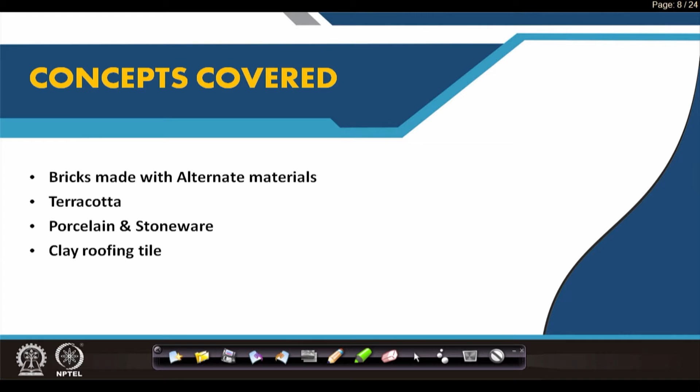So welcome back, let us start today's lecture, lecture 3 of module 1, which is the continuation of clay products. What will be covered is basically bricks made with alternate materials, a shift from clay. We will look at what alternate materials help in making what is also called brick, and then go back to clay items like terracotta, porcelain, stoneware, and clay roofing tiles.

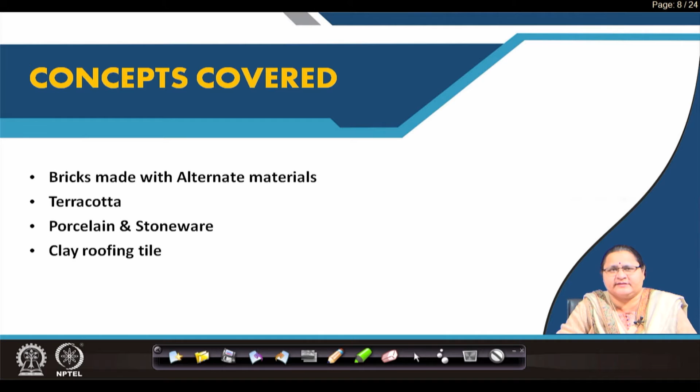Brick, as we have all understood, was the basic building material that most of our country, or developing countries like ours, are using, but it causes a lot of depletion of our natural resources. At the same time, we need to look into wastes, how we can take care of them, and whether we can use them up in the form of this tablet or brick.

Fly ash is one such waste product coming out after combustion of pulverized coal. It is very fine, finer than sand, and moves around in the atmosphere in and around a thermal power plant generation area. It pollutes the atmosphere too, but it is collected in ash ponds, from where it can be carried to a brick making area, and following similar principles, it was evolved as an alternate building material replacing clay brick.

So it is a little lighter than clay brick, absorbs less water, is machine made and dried in a controlled environment, and no burning is required. It is less energy intensive. At the same time, it is consuming a lot of waste material.

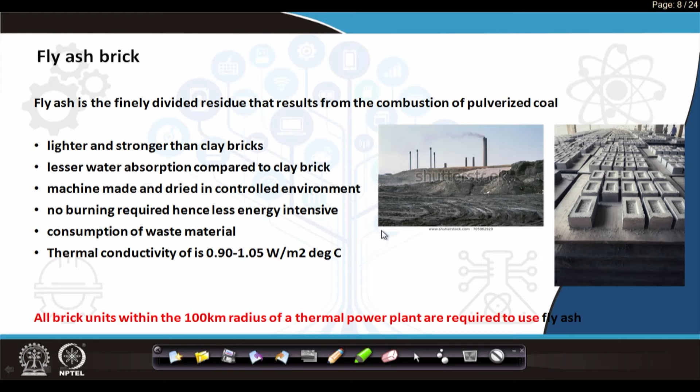So what are the advantages? It is less energy intensive, it uses up the waste as its raw material, and it does not take so much time. It has to be dried in a controlled environment and then you can sun dry it.

These are molded from machines, as you can see in this picture taken from Gava fly ash brick factory in Kharagpur. You can see the fly ash which is lying around has been converted to this brick. So a lot of construction is being done using this fly ash brick.

It has become popular and gradually it is at par in price with clay brick. Earlier it was coming much cheaper, which was also a reason why general people did not buy it. They thought it was cheaper because it was inferior in quality, but it is not like that.

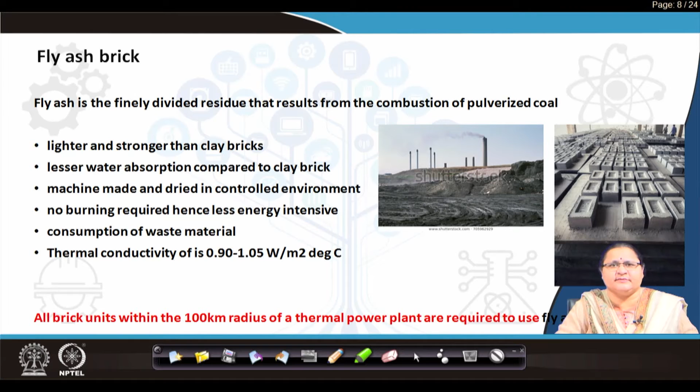Fly ash brick is one such item, and if you see the ingredients, fly ash is around 60 to 80%, and the rest is sand and cement, which is around 8 to 10%. It may also be replaced by lime, because cement or lime is the stabilizer which helps the items to bind together.

These are mixed with the desired amount of water to get the desired consistency, molded, control dried for 24 hours within a factory shed, and later put under the sun and then made ready for the site.

You can see the strength here, it is as good as a second class brick. Weight is almost like that of a first class brick, however clay bricks may be a little heavier. Fly ash brick maintains this 2.6 kg weight, and its use is similar to that of clay brick.

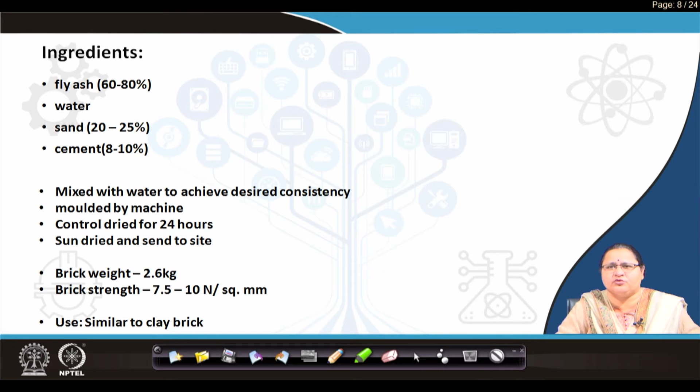You may plaster it or may not plaster it, because the water absorption, which I think is not mentioned here, is also up to 15%. Now I introduce another item, which is since 2005, our Auroville Earth Institute has experimented with earth blocks.

So this is compressed stabilized earth block in form of bricks or in different shapes as required. This is moist earth or clay, what we call, under high pressure around 20 Newton per square millimeter pressure. They are becoming building blocks.

They are having much lower embodied energy as compared to even fly ash brick and clay brick. It has low carbon emission. As fly ash brick flies around and creates lot of pollution, here the clay fired brick is also creating lot of fuel burning,

which leads to carbon emission. This compressed stabilized earth block is only using pressure to make it a stable earth item, clay item, and you see the compressive strength is also between 5 to 7 Newton per square millimeter, which is also quite good.

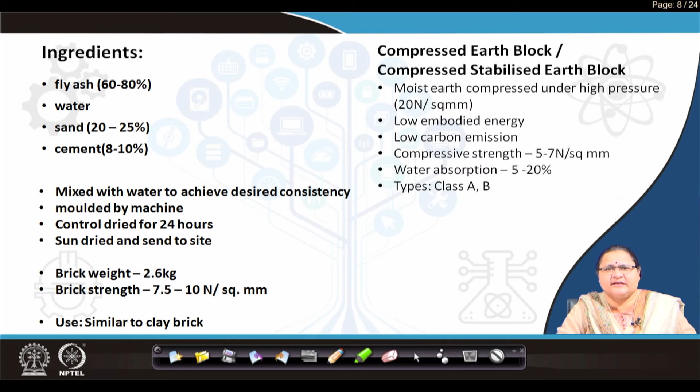which can replace fly ash brick or maybe clay brick. So with these all, I think we are over with all the types of brick items, which are the basic building block. Let us move to terracotta. Maybe some of you are familiar with this kind of image which has been displayed here.

This is the facade of or entry of a temple, and you can see lot of ornamental works being displayed, and this is facing the inclement weather. It is standing for few hundreds of years and nothing has been damaged. Why so? The ingredient is not just clay.

Clay has been supported with ground glass, crushed pottery, that is broken pottery items, which has been grounded and used, and clean white sand. So with clay goes, which is the maximum percentage, with which goes ground glass, crushed pottery and white sand, which again mixed very nicely many a time in the pugging mill and then molded out with this ornamentation on it.

And with this ornamentation, the entire thing is put into the muffle furnace and is being burnt.

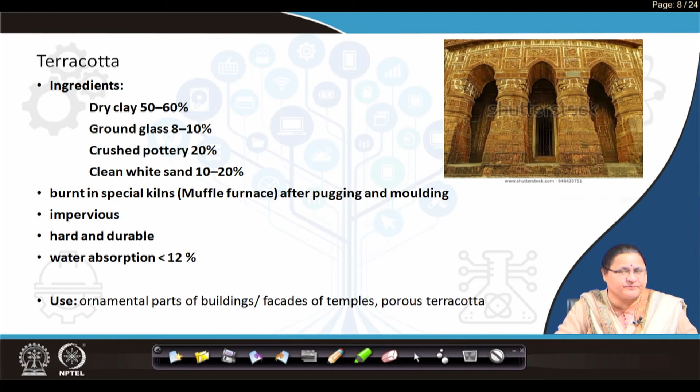Now let us move to the other two items, the porcelain and the stoneware. You can see the pictures on your left hand side, the wash basins, the cisterns, the commodes, the water closets, the sinks,

that is all the sanitary fixtures are having a glass like coating on top of it, and it is seamless, it is very smooth. It has, why is this used? Because it has antimicrobial property. It does not carry stain. It is not affected by acids and alkalis.

It has a permanent coating on top of it, which is the glaze, and you see it is made of china clay, feldspar, kaolin, silica and clay baked together at a high temperature to achieve vitreousness. As you had seen brick going up to 1100 degrees centigrade or so, these items are baked further at higher temperature to get the quality of vitreousness, vitrification.

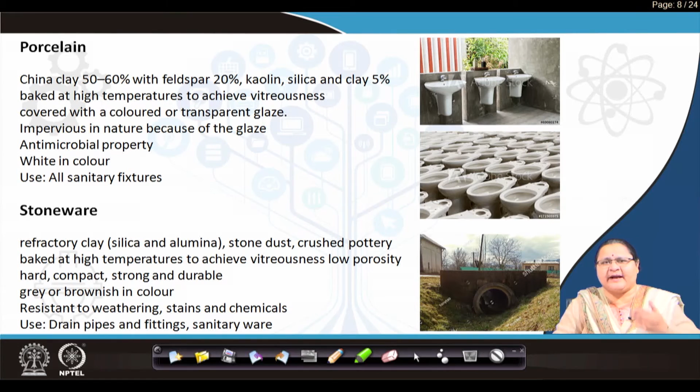Another item which I have not put into the slide is earthenware. Those are not so stable like stoneware, but they also find their use, not much in building industry, but also some in piping. Now, after we finish with all the items, we come to the last one.

Under clay is clay tile, and particularly clay roofing tile. We have flooring tiles, we have wall tiles which are also made of clay, but we will cover that when we are into glass and ceramics.

So what you see here, this clay roof tile is used as a unit to cover the roof. When you go along countryside, you can see such kind of images. It is usually sloping, as you see in this section.

The most important point is they are much thinner than brick and they don't take much load. Yes, one human load, two human load, 2-3 people can go on top of the roof for some repair and replacement work, but it cannot take load. So you cannot have an independent floor on top of it. It is only to protect you from rain and wind, so it is the covering or the roofing.

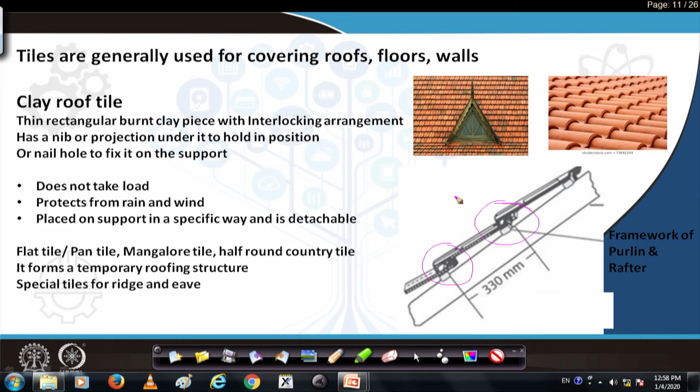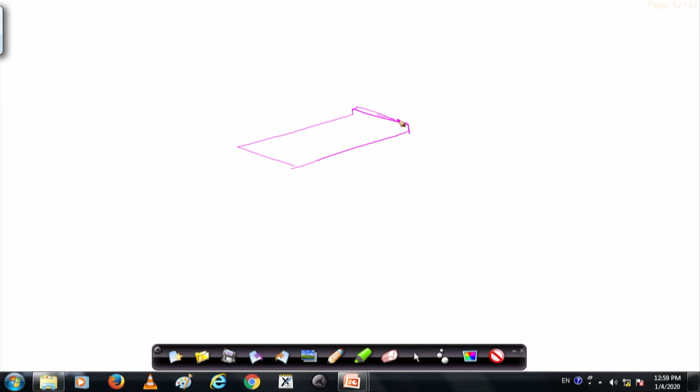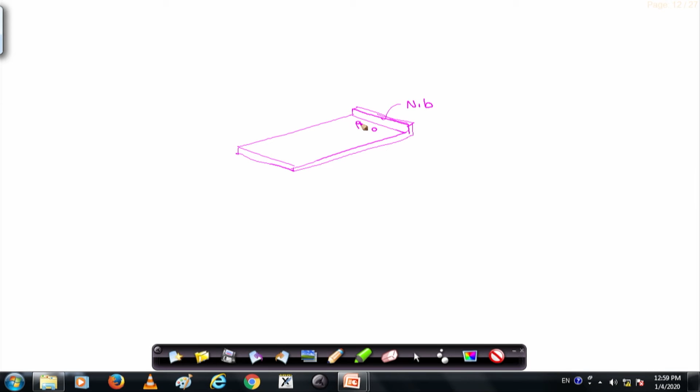It has a supporting member or a nib that will help it hold or cling - that is called the nib. It holds it to cling with the purlin or the framing system; I will come to that, I will show you a better picture. And you have two holes called the nail holes, which run through and through, on which you can screw it onto the support it is clinging to. This nib may be continuous, or this nib may be in pieces.

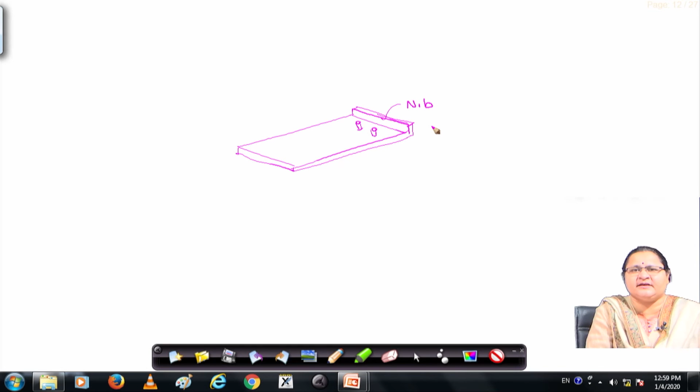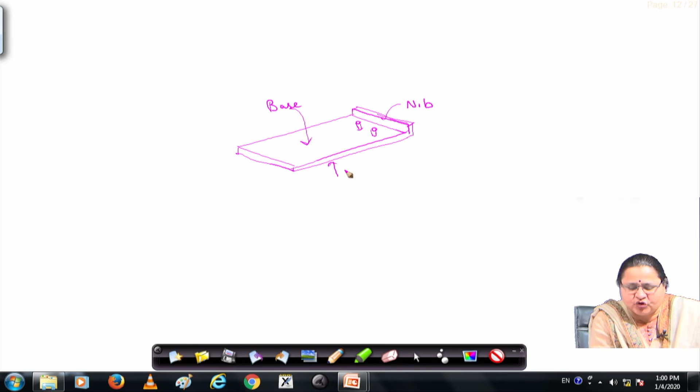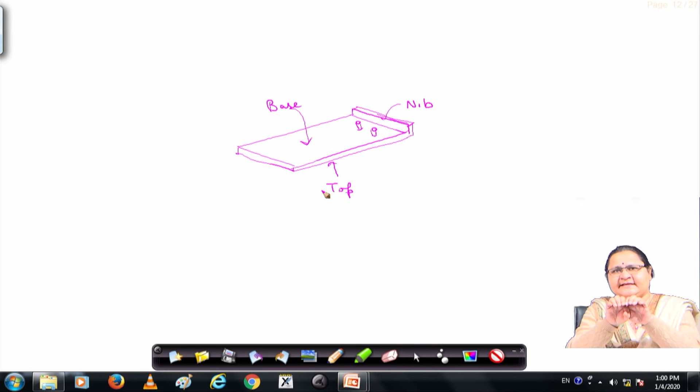So this is the base of the tile what I have drawn, and that is the top part which you see below. So this thing is actually like a claw, it is holding the vertical member, the frame, and sitting there. So what I drew is a very flat tile or a pan tile.

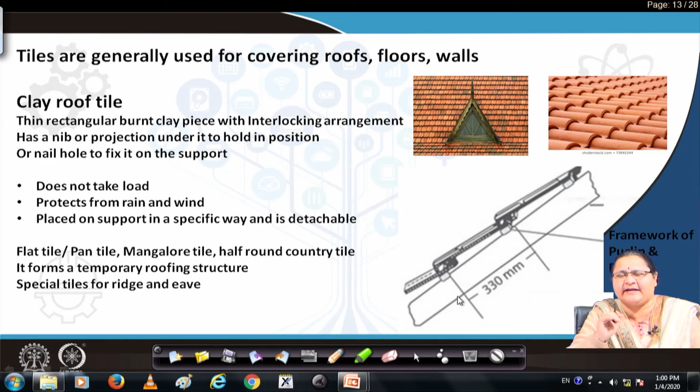Across the country you will see Mangalore tile, half round tile and various names, various forms, but you have to remember there is an interlocking arrangement. I had drawn the flat tile. So how is the interlocking happening? Let us see in the next slide.

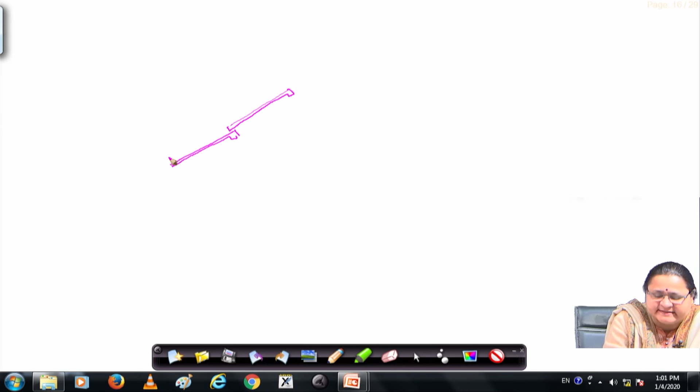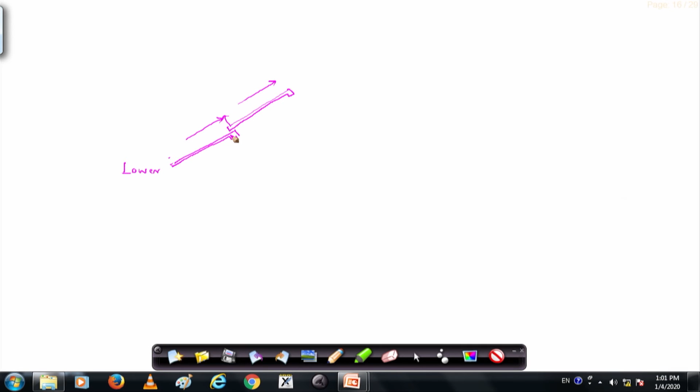So, if this is the framework, your tile is sitting like this and your next tile is sitting like this. So, how are you starting? You are starting your tiling process from the base, from the lower, and moving to the higher, because you cannot pick up this and place this one. So, you are placing your lower tile first and then topping with the upper tile, and below is the frame.

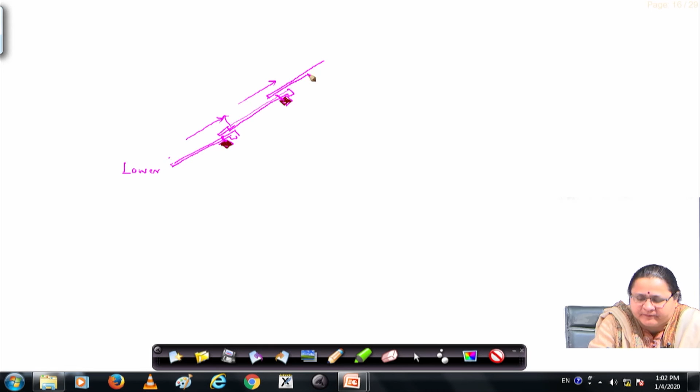Maybe this is the wooden frame onto which it is clinging. So, how much will this go? This tile will actually have to protect the nail hole. So, here is the nail hole. So, the next tile should start from here, so that no water can enter into the system, into the room.

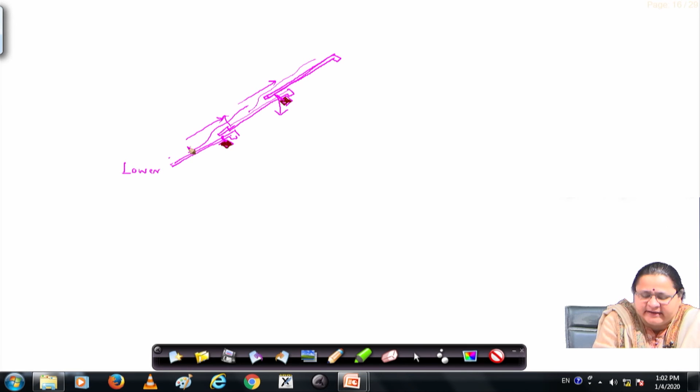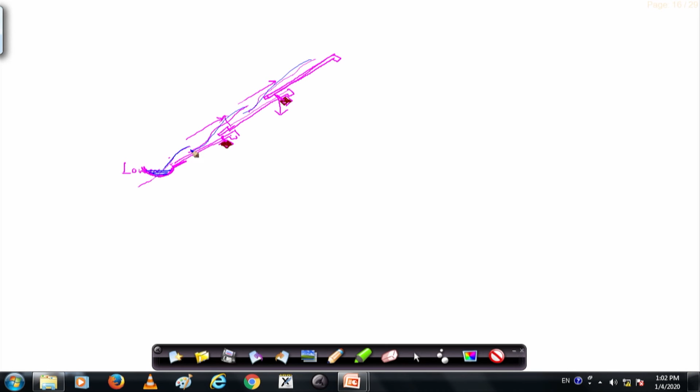So, you have to remember this upper tile should cover the nail hole and it must drain all the water to the next and again next and again next. And at the end you must have a special gutter system which again will be supported, which will collect the water here, which is coming down and gets drained. So, no water can enter here and disturb or allow water entry into the building.

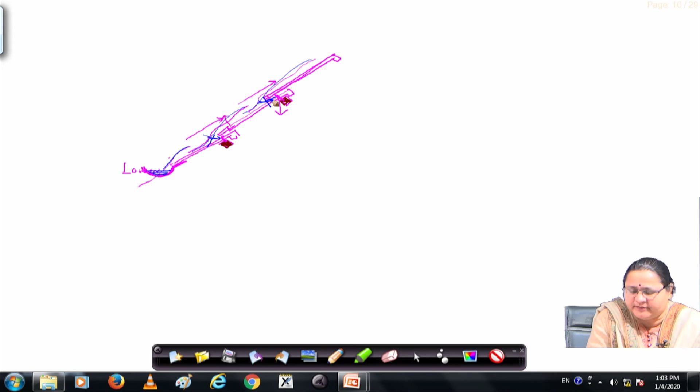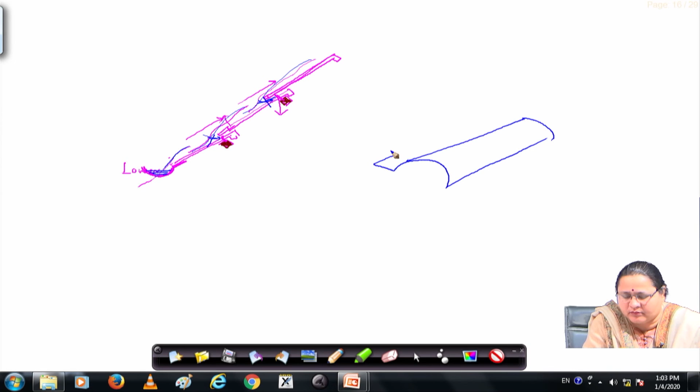Now, what happens on the sides? You will see - so, when you are getting the view, you are seeing only this circle thing with a very small gap which is allowing the water to flow. But actually the tile starts from here and goes till there, again it starts from here and goes till there, where the lower part is not visible.

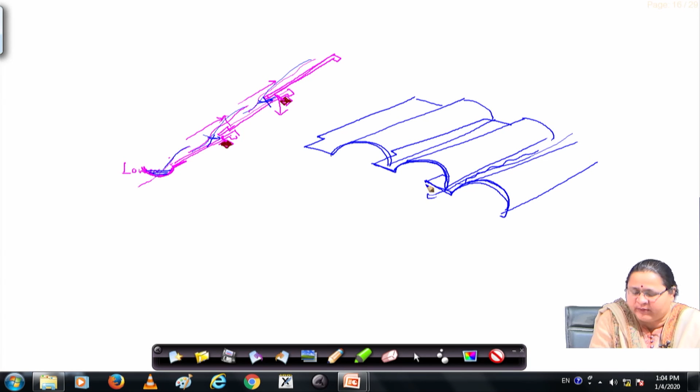It may be sometimes under tile and over tile, it may be something like this and something like this. So, this may be one tile and it is supported with an over tile. So, there may be many types.

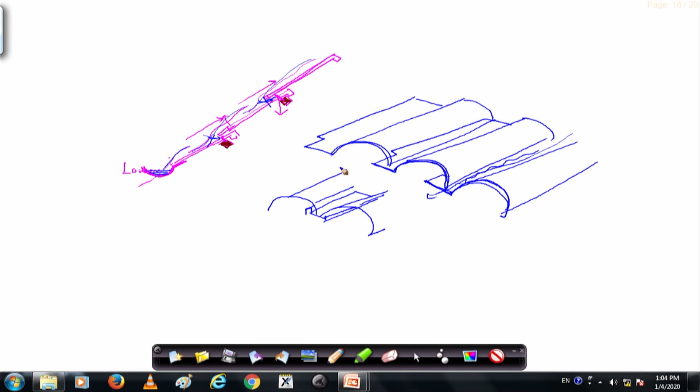So, on the side there is again an interlocking method adopted, so that water does not leak into through the roof. So, on this side you are having a tight interlock, on this side you are having like a claw interlock, and the over tile, the upper tile is covering the nail hole, so that no leakage is happening. So, your roof becomes watertight.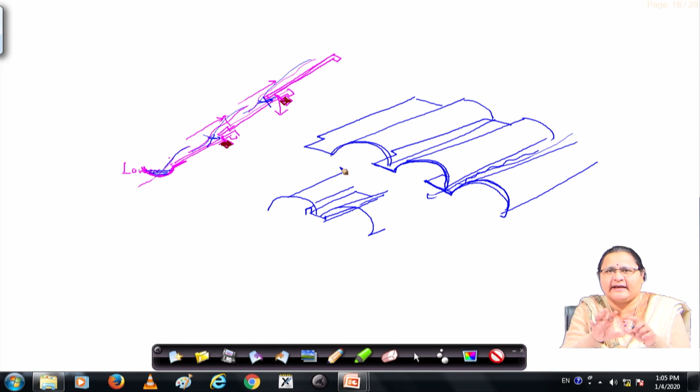And any kind of replacement required - as I told you, these are not capable of withstanding load. Even a hitting of a stone can make it break. So, you can actually move it, take out the nail holes, and you can replace the tile.

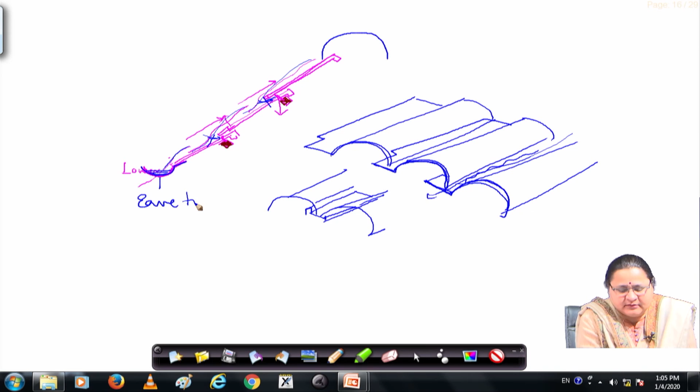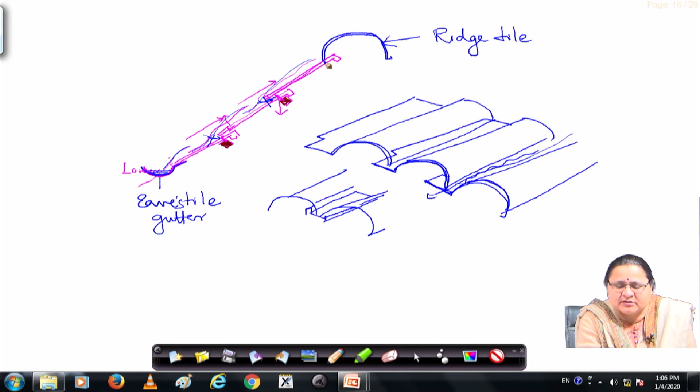What happens at the top when it is ending? As you had something called the eave tile, specially made for eaves gutter. Eaves gutter has a special tile. For the ridge or the top, you can have a special ridge tile, so that no water can enter through here. So, now this sits on the frame which I had shown you.

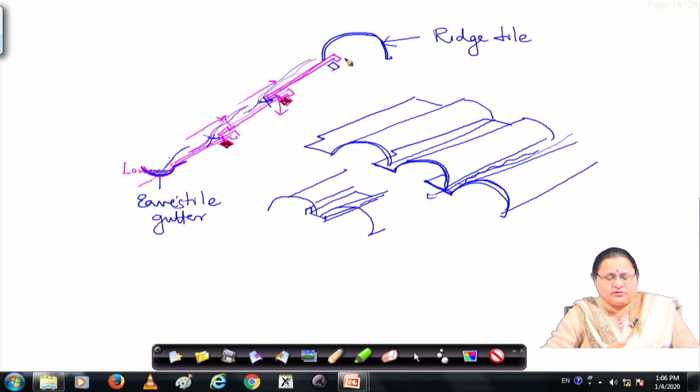So, let us go back. So, this is the frame. Now, how are these frames to be fixed? You have to know what is the locally available tile dimension. Based on that, these wooden supports called purlins are to be fixed, and these are the common rafters onto which they are to be fixed. And here comes the ridge, here comes the ridge tile, here at the end comes the gutter tile, the eaves gutter, and in between these you will get your tiles.

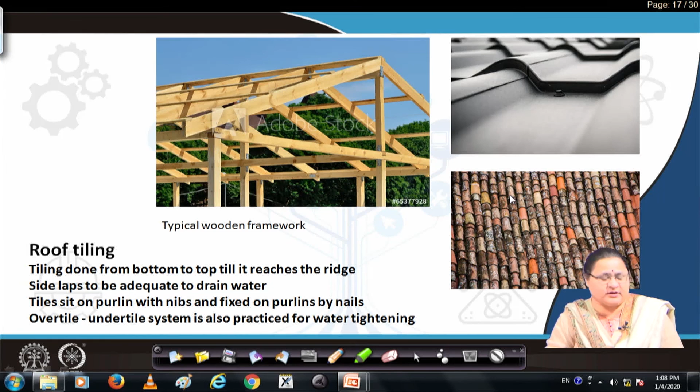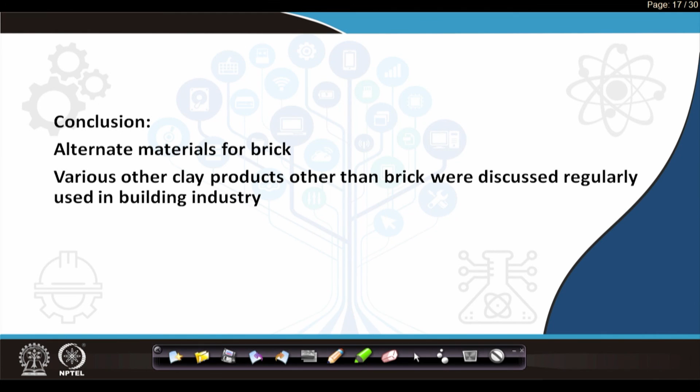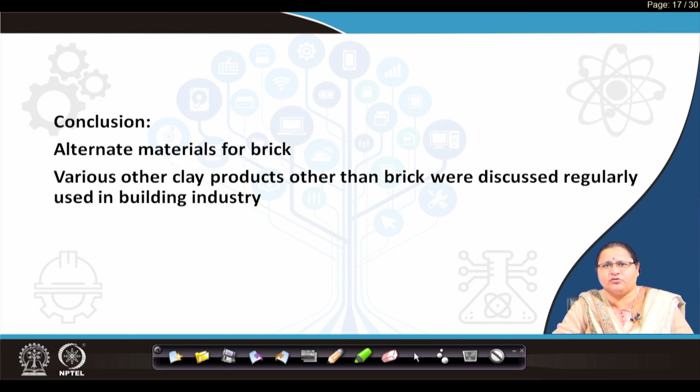With all these, I conclude with the clay items, clay products, and also the alternate materials used replacing brick. The various other clay products that we studied are the terracotta, the porcelain, the stoneware, and the clay tile. Under clay tile we understood how it has to be fixed. Similarly, we knew in case of brick how bricks are to be arranged to get brick masonry. Here we understood how clay tiles are to be placed to get a proper weather resistant roofing. So, we conclude here with clay, and thank you to all.